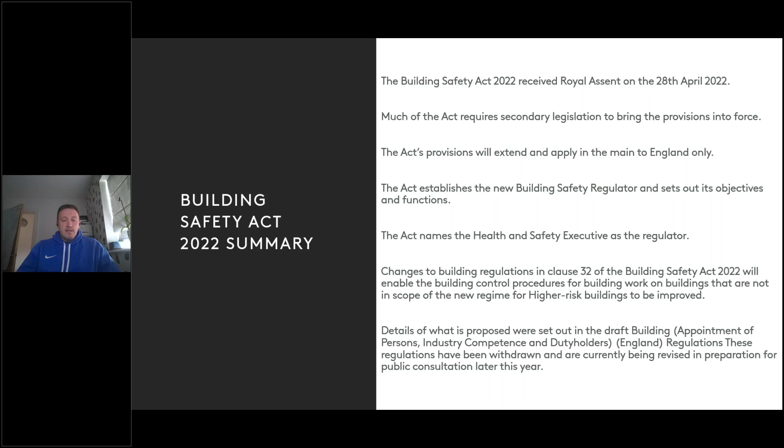So an overview of the Act itself and breaking it down into the parts. The Building Safety Act comprises 6 parts, and it's got 9 schedules, primarily devised to ensure the safety of people in buildings and to improve the safety standards within construction.

As I'm sure all of you are aware, this was born really out of the Grenfell Tower tragedy, and once we started to look seriously at how that building was constructed, and at the wider construction industry and fire safety management in construction, managing products, materials, and adherence to building regulations and their functional requirements, we realized that there was a big problem, which as an industry we've been working our way through, making the remediations initially at vast cost to the taxpayer, but now a lot of building developers have actually refunded that money back to the Building Safety Fund, and they've paid for the remediations themselves in full.

So part 1 of the Act provides an overview of the Act itself. Part 2 establishes the new building safety regulator within the Health and Safety Executive and sets out its functions in relation to buildings within England. So that's its functions in terms of enforcement and its duties and how far those duties extend.

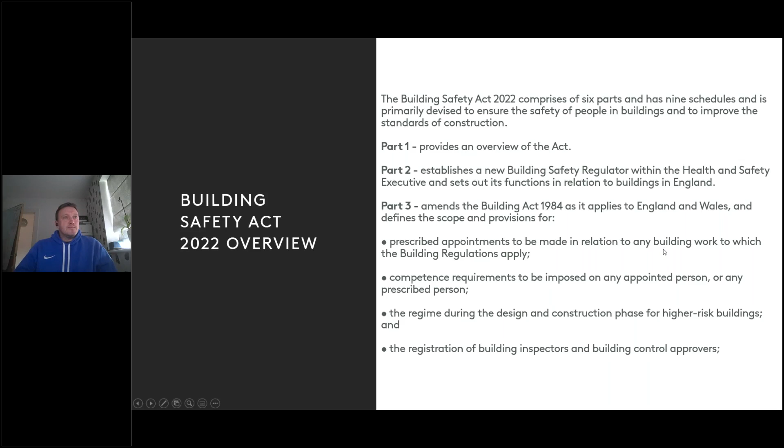So breaking it down slightly into different sections. This section we're looking at the Building Safety Regulator. So the HSE will head up the Building Safety Regulator, and it's got three main functions. It's to lead the delivery of a new, more stringent regulatory regime for high-rise buildings which are within scope. So that's high-rise buildings that are 18 metres or above, or 7 storeys. It's to promote competence for all buildings, including industry and professionals working on buildings and building control bodies, and finally provide oversight for the safety and performance of all buildings.

The Building Safety Regulator will operate proportionately and will be an evidence-led regulator. We've had that from briefings from the head of the Building Safety Regulator, and it aims to re-establish confidence in the system so that residents are safe and also feel safe in their homes. So the Building Safety Regulator is a key part of this.

One of the main issues that we've got, or we perceive as an industry though, is resource. The current planning approval cycle, which involves other statutory consultees, is currently quite cumbersome, and the Building Safety Regulator will be effectively part of the process now. And we'll have to jump through hoops at certain gateways, and there could be what are called hard stops placed on new developments. So it'll be interesting to see what resource we've got, and if that causes any issues.

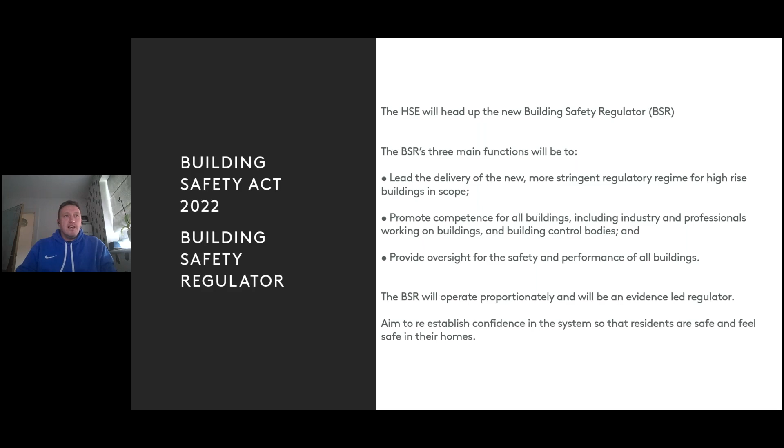So we keep talking about higher risk buildings. Well, higher risk buildings are defined within the Building Safety Act, and they're defined as a building which is at least 18 metres in height or 7 storeys. So that's what defines a high risk building. So when we keep referring to high risk buildings and the application of the Building Safety Act in relation to them, this is what we mean.

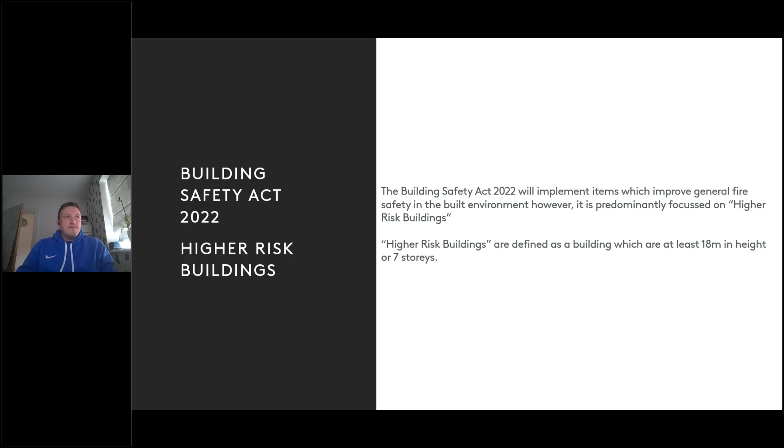So the gateways that I talked about may present us as an industry, if we're a developer or if we work within the construction industry, these are what we're talking about. Well, if they're managed correctly and resourced correctly, I can't see it being a problem. I think we all agree that the sentiment is great, but we'll have to see how they're implemented and what bottlenecks that causes. So Gateway 1 is already actually in force. It came into force through the Town and Country Planning Act. I'm getting ahead of myself here. I'll just give you a summary.

So Gateway 1, the planning stage, applicants will need to demonstrate that fire safety matters have been taken into account in broad terms. It doesn't have to be super detailed, but they do have to show that you've considered fire safety for the whole development. Gateway 2, there will be a hard stop on construction, which cannot begin unless the regulator has approved the application. And Gateway 3 would be at completion of construction, there'll be a hard stop on occupation to allow the regulator to carry out final inspections and issue a completion certificate.

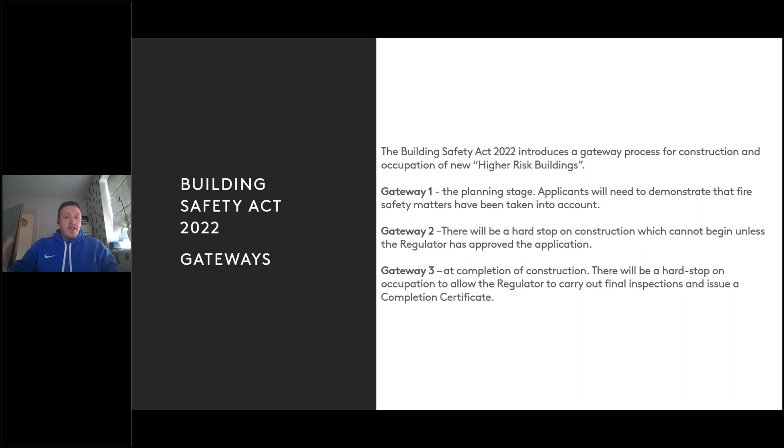So that's effectively, once you've built the building and you're achieving PC, practical completion, and you're going to move into occupation, they need to know that you've got all of your checks and balances in place, all of the information for that operator to then move in and operate the building safely.

Gateway 1 came into force 1st of August 2021 through the Town and Country Planning Act, and it basically requires us to consider fire safety matters and make sure they're incorporated into the planning stage for high risk buildings, and we do that in the form of a fire safety statement. The HSE is a statutory consultee at this stage, and submission of the fire safety statement will be required when seeking planning approval for any new higher risk building.

Gateways 2 and 3 will require secondary legislation to be in place before they're fully implemented. This currently sits within the draft Building (Higher-Risk Buildings) (England) Regulations, and these will set out the proposed time limits for the regulator to perform its statutory duties in relation to work involving construction of high risk buildings. So what we mean there is that there will be set timescales by which they should be reviewing your planning applications and reviewing your full building design approval.

Currently that sets 12 weeks in theory, but again, we're looking for some clarity around how that would work. You know, are we submitting full approvals, waiting 12 weeks, getting feedback on any changes, alterations they need, and then that clock starts again? Or are we in constant dialogue through that 12-week process? Is there any scope for early engagement like we do with the fire service currently? So it's a little bit up in the air, but again, gateways 2 and 3 do require that secondary legislation, so hopefully that will be ironed out in the future.

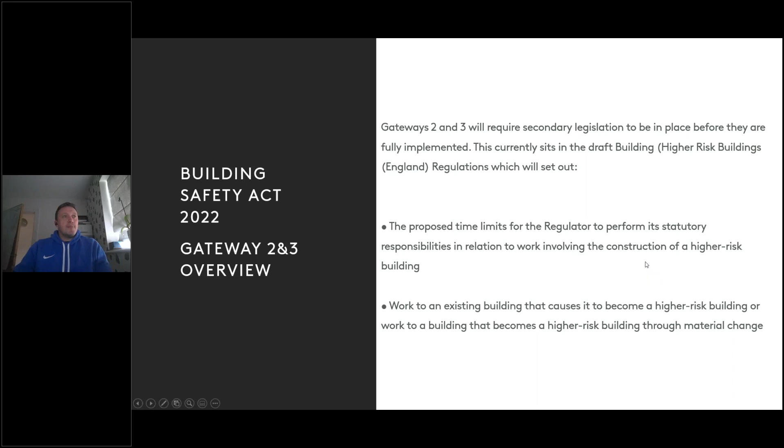Gateway 2 is designed to be a hard stop, requiring a fully developed building control application to be approved before commencement on site can begin. Detailed information may include the competency of the principal contractor and principal designer, and that involves signing up to a competency statement where you, as the accountable person or the principal accountable person for that project, will state, yes, this principal designer, principal contractor are competent to undertake those duties.

To be honest, it's a little bit like we do with CDM regulations at the minute. You know, it's down to the client to prove competency, and you do that via a number of means: skills, knowledge, experience. However, there are some documents which I'm going to go through later which actually assist us with this. So British Standards Institute have put out some documents around competencies for the different core participants in a project, and we'll run through that a little bit later.

Also, the description of works and a detailed plan of works, construction control plan describing how building safety will be maintained during construction. So they're looking at not only designing safety into the building, but also how that building is going to remain safe through the construction phase. The design and build approach, the fire and emergency file, arrangements for the capture and maintenance of golden thread information. We'll go through golden thread shortly, and a planning statement from Gateway 1. So that's effectively just pulling across some information from Gateway 1. So as you can see there, Gateway 2, there's quite a lot to consider prior to putting in that fully developed building plans approval.

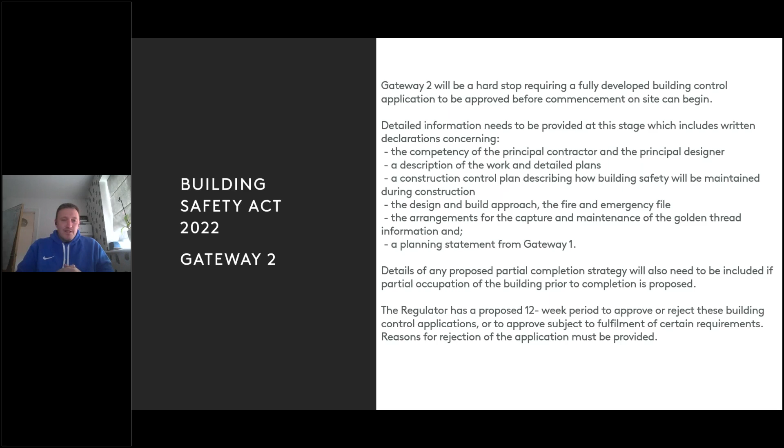Gateway 3 is intended to provide assurance that the building is safe for occupation and requires the issue of a completion certificate from the regulator. Some of you may be old enough to remember fire certificates from the previous 1997 fire regulations. It's a little bit like that.

Effectively, what we have to do is present the golden thread of information that's been captured through the construction project on any items that are going to keep that building safe, and we have to present evidence that we have gathered that information in a format that's easy to understand, and we've passed that information on to the building occupier that's coming in. This will include things like commissioning fire risk assessments, commissioning evidence, test evidence, but it all needs to be in a format that is usable for that end user.

That golden thread of information is really key to managing the building safely. There's lots and lots of O&M information in there. So if, for instance, you get a breakdown in your smoke control system, then what is the redundancy to that system? What are the implications of that system going down? Is there anybody that you need to notify when that goes down, such as the fire service? How long do you get before you need to notify them? All these things can be pushed across into the operational management of the building, and once that's been handed over, the responsibility for maintaining that golden thread of information then sits with the building operator.

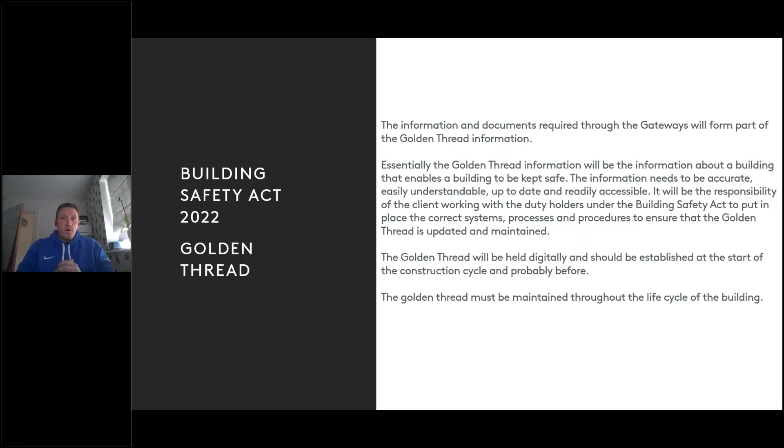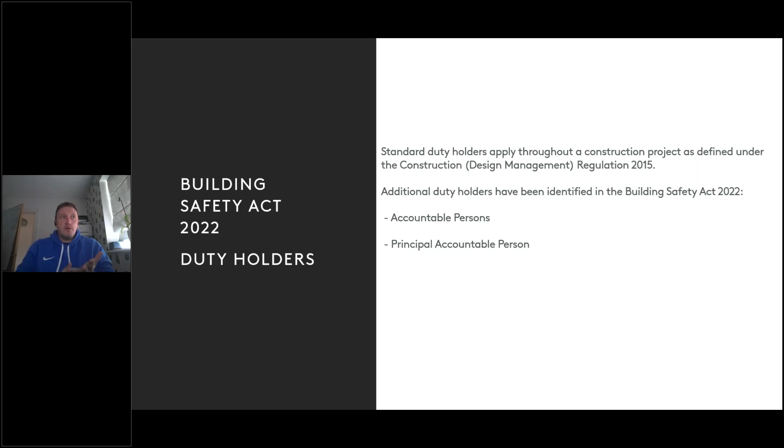So as I said, there's lots and lots of ways to do it. You've just really got to decide what is best for you. Standard duty holders apply throughout the construction project. So we've got CDM duty holders: the principal contractor, principal designer, client. They will apply, but additional duty holders have been identified within the Building Safety Act itself. So you've got accountable persons and the principal accountable person.

The Act defines an accountable person as someone who holds the legal estate in possession of any part of the common parts, or does not hold a legal estate in any part of the building, but who is under a relevant repairing obligation in relation to any part of those common parts. So you could have multiple accountable persons within one building.

So you could have a landlord that's responsible for the landlord areas. You could have a leaseholder that's responsible for areas that they have under their leasehold. You could have the building management company, where through contract you've delegated certain responsibilities. The developer, prior to handing it over, and actually the developer keeps hold of certain rights for potentially up to 30 years after construction. And the contractor themselves; at different parts during the building going up, different accountable persons will come in and maybe drop off.

But as long as they're aware that they are a duty holder, because you are a duty holder by virtue of the fact that you've built something, or you hold a repairing obligation for that. So it's not like you would appoint somebody. As soon as you give somebody a repairing obligation for that part of the building or that element of the building, they are an accountable person. As it says at the bottom there, it is possible to have different accountable persons for each part of a high-risk building, and the Act does not seek to impose any limits on how many accountable persons there may be.

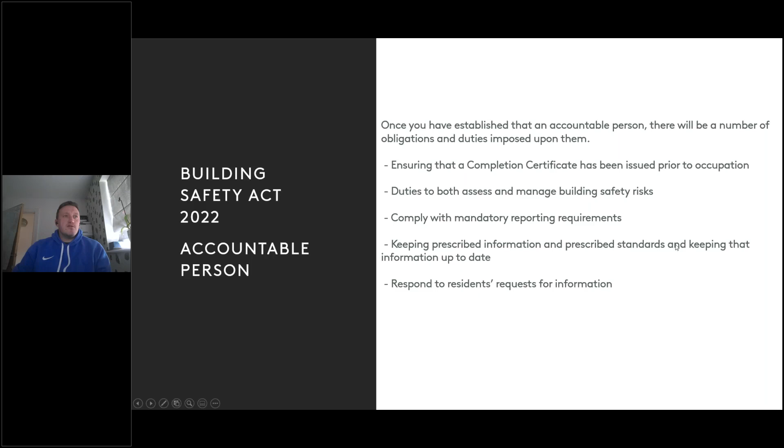So once you've established an accountable person, there will be a number of obligations and duties imposed upon them, including ensuring that a completion certificate has been issued prior to occupation of their particular area, because we talked about phased practical completion, so you may end up with a number of completion certificates, and the scope of that completion certificate would just be for that particular area. Duties to both assess and manage building safety risks, comply with mandatory reporting requirements to the Building Safety Regulator, keeping prescribed information to prescribed standards and keeping that information up to date for your particular area, and responding to residents' requests for information, which is a big part of the Building Safety Bill.

Now, duties of the principal accountable person include registering the building with the building safety regulator, applying for a building assessment from the building regulator, applying for a building assessment certificate once that assessment's been completed, displaying the assessment certificate in a prominent location, preparing a safety case report. And the safety case report is slightly different to the Gateway one. The safety case report is all about how you're going to manage the building safely.

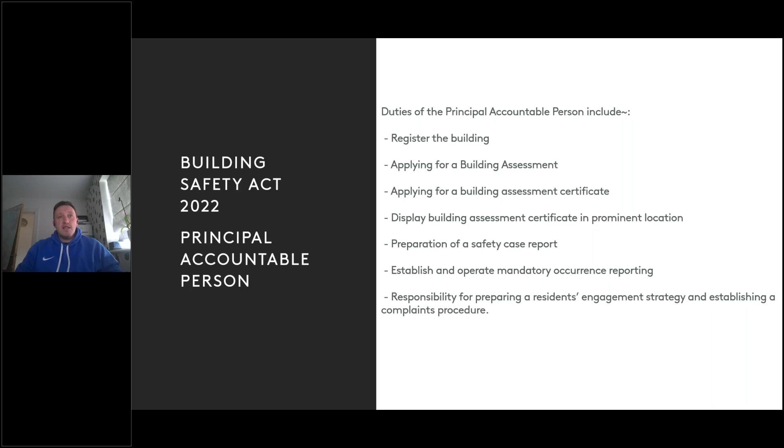Establish and operate a mandatory occurrence reporting into the building safety regulator, and they're also responsible, and this is I think one of the most important parts, for preparing a resident engagement strategy and establishing a complaints procedure for that particular building.

Going on to some of the issues that we perceive with the Building Safety Act itself. These aren't all of them. I could go on all day. There's things that are yet to be ironed out, but one of them is the building safety regulator resource and the implications on the gateway system.

Putting in hard stops is a great way to go to ensure that everything's bottomed out before you move on to the next stage, and it's been that way in Scotland for a while. However, it's just a resource issue. We already experience resource issues in the current planning arrangements with statutory consultees such as the fire brigade, so we're just hoping that there's enough resource there for the demand that's coming down the track.

Competency statement, so there's a requirement on the principal accountable person to put forward a competency statement in the design stage, and effectively you've got to do that before you start on site. But in D&B world, you may not have selected your contractor at that stage, so what you may have to do, and we're still seeking clarification on this,

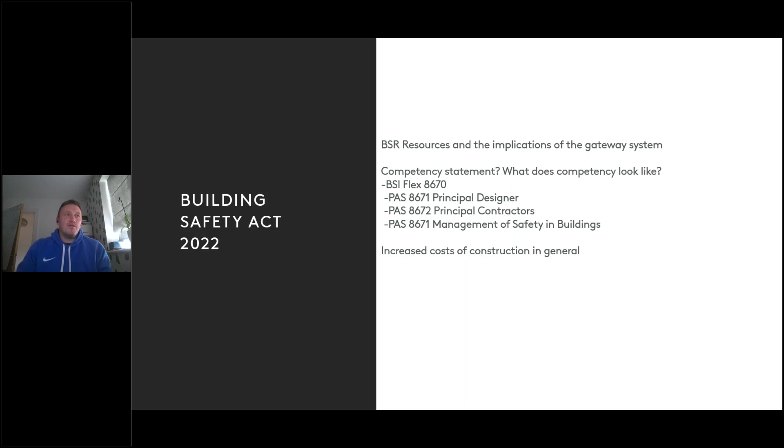As a final slide, I've taken this from an APS document, the Association of Project Safety, and this is a timeline of the Building Safety Act and what's coming in. So for those of you who do want this information, I will attach the APS document as well. It's a freely available document, so there's no problems with copyright, and there's quite a lot more detail in that document about the building safety bill itself.

But as you can see, the Building Safety Act 2022 gained royal assent on the 28th of April, and then from this point on you can see that there's going to be a number of stages, a number of pieces of secondary legislation that need to come in, and we're probably not going to be hitting full implementation of the Building Safety Act until the middle of 2024.

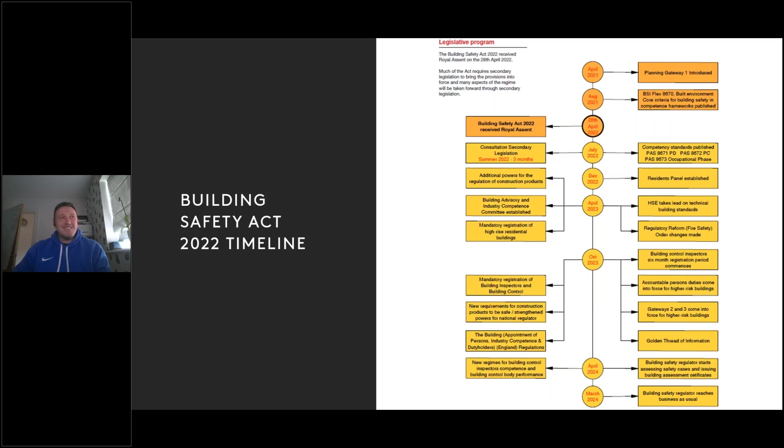But there's so much change. Probably one of the biggest pieces of legislation change to our industry since the 1974 Act. So it's something that we need to get across. And if you need help in understanding it and you need assistance, now's the time to get it, because every man and his dog is looking for that same assistance. So just try and get ahead of the game.

So briefly on to Fire Safety England regulations. So this is more to do with operational. So we've talked about the Building Safety Act, and that's more to do with the development of buildings and then managing those new developments. But what the Fire Safety England regulations do is it's a new legislative requirement, and at present only applies to England, and it's been introduced through Article 24 of the Regulatory Reform Fire Safety Order.

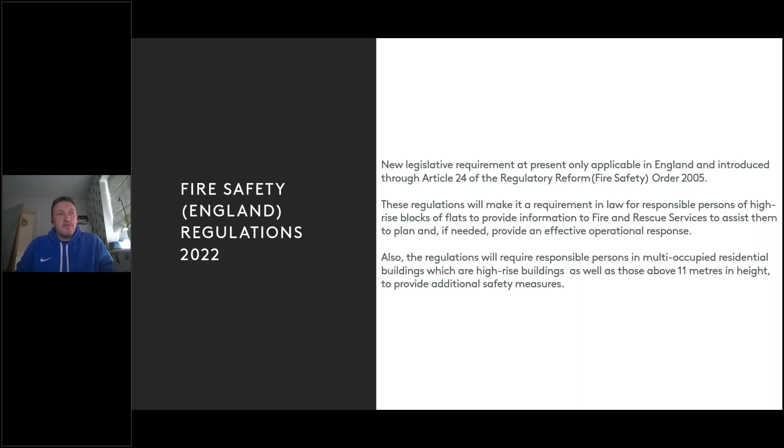These regulations will make it a requirement in law for the responsible person of high-rise blocks of flats to provide information to the Fire and Rescue Service to assist them and to plan and, if needed, provide an effective operational response to that building. Also, the regulations will require responsible persons in multiple occupied residential buildings, which are high-rise buildings, as well as those above 11 metres in height, to provide additional fire safety measures. And we're going to run through those now.

So I'm going to break this down, and you'll see over to the left where I put high-rise requirements, and then there's other requirements. So if you just have a look over there, you'll see which requirements apply to which buildings. So in high-rise residential buildings over 18 metres or 7 stories, the responsible persons will be required to do the following. So building plans. They'll be required to provide their local fire and rescue service with up-to-date electronic building plans, and to place a hard copy of these plans alongside a single-page building plan which identifies key firefighting equipment in secure information boxes on site.

So this applies less to buildings that have got things like 24-hour security, 24-hour concierge, because you've got an actual person there who can liaise with the fire service and show them the plans and provide them with that digital information. Where a lot of buildings don't have that concierge service, or don't have that 24-hour security presence due to the way that their service charge is structured, and it may be a high-rise block of flats that's a local authority block of flats or something like this, but it applies to all blocks of flats, there will generally need to be a fire service box.

We are currently going down the route of installing Gerda boxes because they're extremely robust, extremely secure, and for the fire service, there's a special key to insert, and all fire service personnel carry that key on their appliance. So it means that we're not having to give them extra keys or key codes and things like that. They all carry this special key, insert it, and then they've got access to all that information.

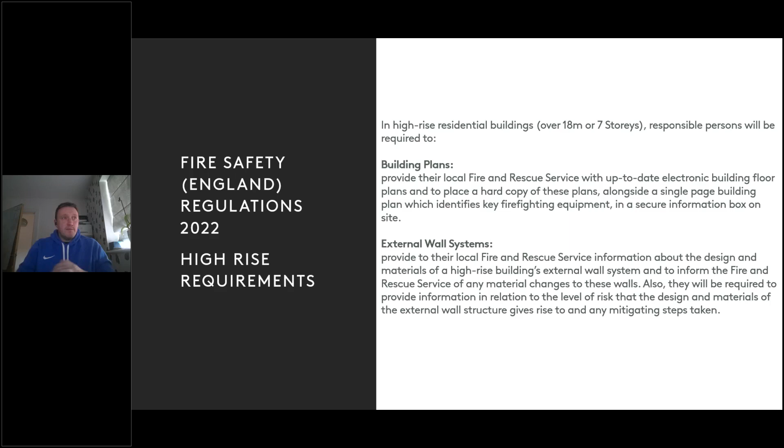Again, this is for high-rise buildings, so lifts and other key firefighting equipment. So there's a requirement to undertake monthly checks on the operation of lifts intended for use by firefighters. So that's firefighters' lifts, and also any evacuation lifts. Evacuation lifts are not as common as firefighting lifts, but especially in the London area, there's London Plan D5B5 or B5D5, which requires new buildings to incorporate evacuation lifts alongside firefighting lifts. So it is going to become more prevalent.

They will also be required to report any defects, any defective lifts or equipment to their local fire and rescue service as soon as possible after the detection of the fault, and if it cannot be fixed within 24 hours. So effectively, if you've got a firefighter lift, the key thing about a firefighter lift is it was placed there as part of the planning application to enable firefighters to use that piece of equipment to get to a bridgehead at a location without taking all of their stuff up some stairs. So it's a specific lift designed for the purpose of use of firefighters.

So if it's down and you've got a 30-40 story building, the fire service is going to need to know about that operationally. So you've got a 24-hour window in which to conduct any repairs. If it's going to extend beyond that through supply chain issues or lead times for spares, then they need to be informed about that so that they can make plans should that building go up.

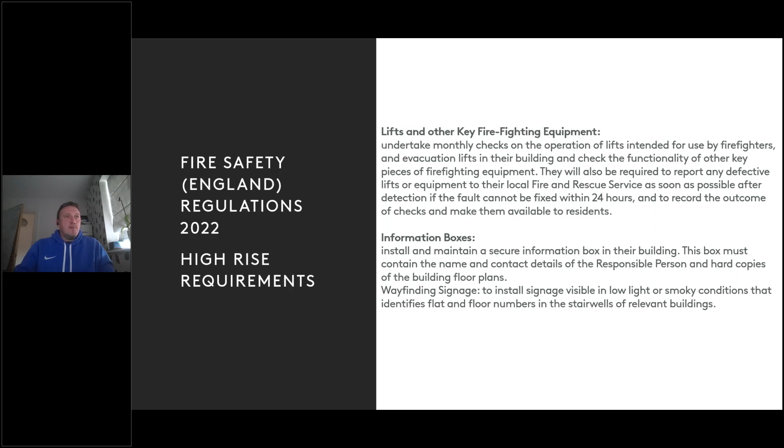So now in buildings over the height of 11 meters, there's going to be a requirement. So that's all buildings over the height of 11 meters, including high rises. There's now a requirement to undertake annual checks of flat entrance doors and quarterly checks of all other fire doors and common parts. So the fire doors and common parts will belong to the landlord anyway, so you should be doing your fire door checks on those, but there's now a requirement to undertake annual checks of flat entrance doors.

Again, there's a bit of an issue here because the government have given out a fact sheet giving some advice on how to do this, because it's going to be extremely difficult. You're dealing with individuals, you're dealing with property that's effectively theirs, and without their assistance, you're not going to be able to get in and undertake a good fire door assessment. So what you've got to do is effectively record how you've tried to get in. So if you've got 200 doors in a building and you managed to only inspect 150 within that year, you've got to show how you've tried to communicate with residents, how you've tried to get in there and check that.

But essentially, the government are suggesting that you've got to make best endeavours. We've asked for a little bit more clarity around what best endeavours mean, but effectively, if you've tried numerous occasions, you've tried leaflet dropping, you've tried knocking on the door, you've tried all these different things, as long as you can evidence that you've done that and recorded that you've done it and when you've done it, then that's your best endeavours.

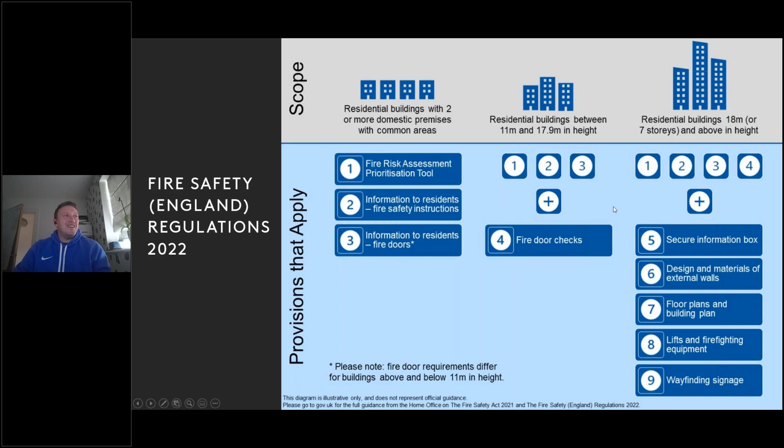So I'll take a breath now and get a drink, but any questions from the floor are fully welcomed. Well done, Billy. Thank you. Wow, there's a lot of stuff there, isn't there?

Yeah, there is. And lots of increased bureaucracy for those involved in the construction of buildings moving forward. And it looks like a lot of new jobs as well that are going to be advertised. What kind of worries me is all the resources that are going to be required for this. You said about increasing costs, and also recruiting all these inspectors is going to take some time, isn't it? And sorting out the competence and everything. So there's quite a lot yet to still happen. But I think it's great to get a bit of a heads up on this now and a good grounding on all this stuff. Yeah.

Some of the costs as well are kind of hidden. So when I talk about competency around certain individuals, we've also got a bit of a competency issue around those conducting workmanship on site. So if I take fire doors as an example, we're now implementing specialist clerk of works for fire door packages. Way back when, say 7, 8, 9 years ago, you may have included a clerk of works for the overall project, and they're really there to control quality of work on site and make sure that the building is going up in accordance with your specification.